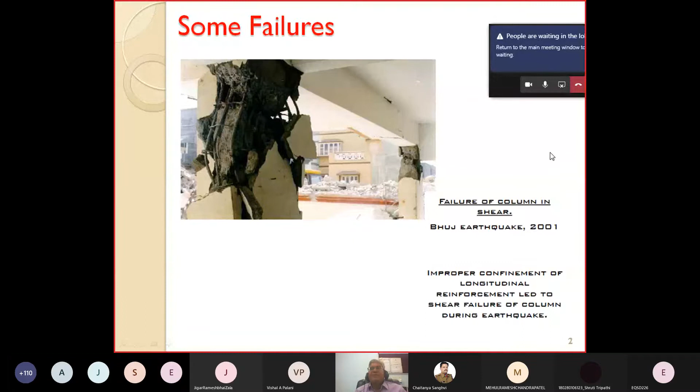Let us have some more pictures. This one shows a similar kind of distress, but a slightly different situation. This is because of the inelastic deformation of the column due to lack of confinement. You can see here all the longitudinal bars have buckled because there is a less amount of confinement to the longitudinal reinforcement.

Another picture of the Kobe earthquake, where the reason was identified as insufficient, prematurely terminated longitudinal reinforcement and inadequate hoop reinforcement. See, the entire bridge is collapsed on one side, and see the amount of reinforcement visible here. This is because of the insufficient, prematurely terminated longitudinal reinforcement.

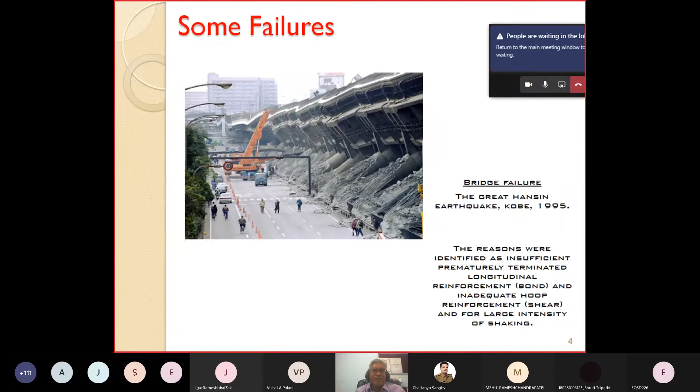This is a very heavy structure. Of course it was a bridge structure, and when ductility is not taken care of properly, the entire bridge is overturned. This is very common in majority of reinforced concrete buildings, which is known as the short column effect.

These are pictures of the 2001 Bhuj earthquake. We can see that the upper story is stiffened by brick masonry infill walls, while the lower story is less stiff. Because of that, there is an uneven distribution of stiffness which leads to failure. The entire building was intact, but it failed from the ground story. This is a very common type of failure observed in urban areas.

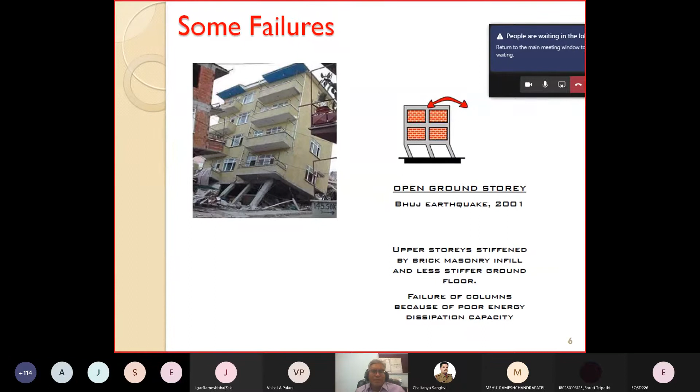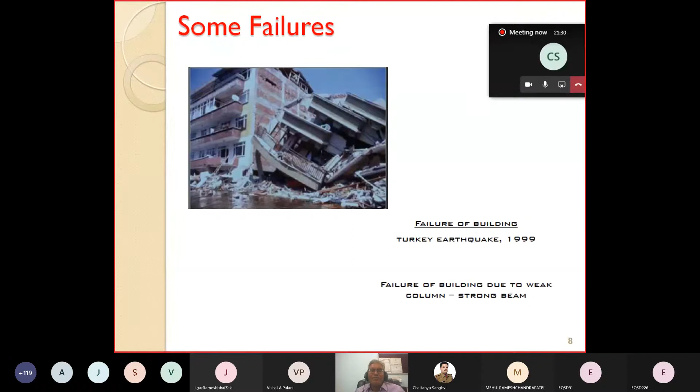Again, failure of the building in the Turkey earthquake, due to the weak column, strong beam configuration. We will see in detail there is a strong column weak beam theory and a weak column strong beam theory. Basically, to make ductile structures, this kind of configuration is not going to be helpful. One has to go for a strong column and weak beam instead of a weak column and strong beam. This will lead to disaster for such a problem.

We can see the caption from one of the very eminent persons, Paulay and Priestley. Many of you might have also used the book by Paulay and Priestley. The observation of building responses in actual earthquakes indicated that the lack of strength did not always result in failure, provided that the structural strength could be maintained without excessive degradation as inelastic deformations developed. The structures would survive the earthquake. So if the structures are forced towards inelastic deformation, perhaps the structures would survive the earthquake. It's a statement from one of the eminent structural engineers, earthquake engineers, Paulay and Priestley.

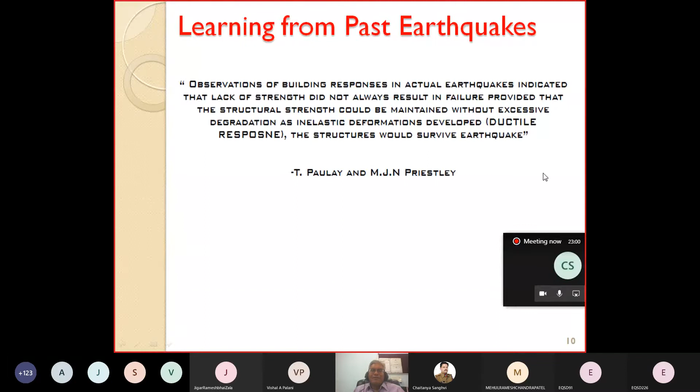And because of this, based on the above statement, an attempt is made here to bring out the importance of ductility in buildings during an earthquake.

So let us discuss some design philosophy. It is economical to design structures to behave in an elastic manner, but it is uneconomical to design structures to behave in an elastic manner to withstand a major earthquake. Why is it uneconomical? That we will see. So one has to go for inelastic behavior to achieve economy in the design.

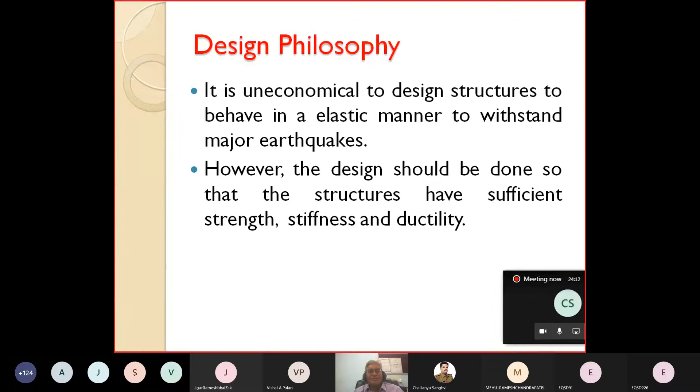The design should be done so that the structure has sufficient strength, stiffness, and ductility. Moreover, most of the time we always concentrate on strength and stiffness, but for earthquake resistant structures, ductility is also an important parameter. There is an utter failure of the strength design philosophy during an earthquake.

Essentially, we need to adopt a capacity design to safeguard the building. So during an earthquake, we need to go for a capacity design philosophy to safeguard the structure. In strength design, the ultimate strength of the structural member is based on assuming a failure condition, whether due to crushing of concrete or yielding of steel. Whereas in capacity design, we design the element suitably for energy dissipation under severe imposed inelastic deformation. So here we have to design the element that is suitable for energy dissipation under severe imposed inelastic deformations.

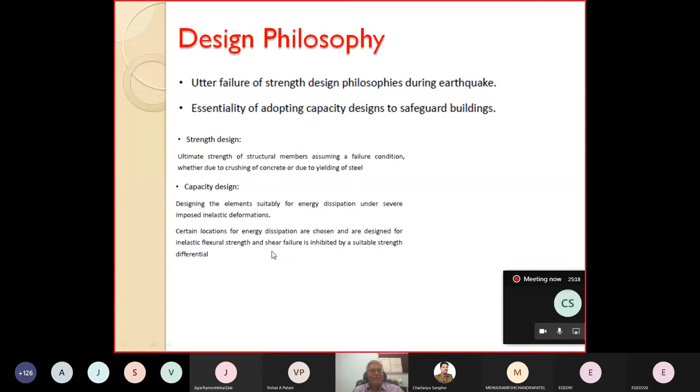Certain locations for energy dissipation are chosen and are designed for inelastic flexural strength, and shear failure is inhibited by suitable strength differential. You might have also experienced a simple example with this chain. This is a brittle chain, and how to make this brittle chain behave in a ductile manner - let us see this thing.

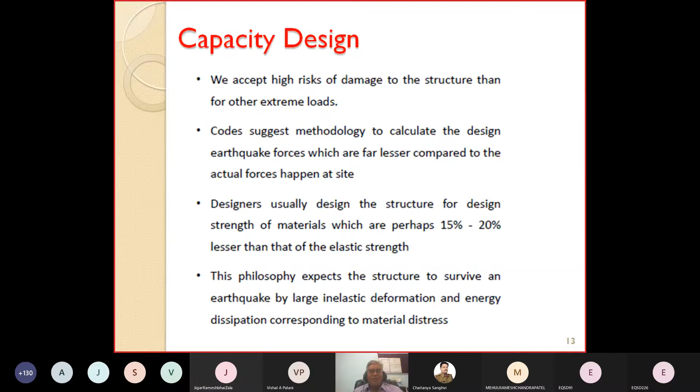Designers usually design structures for the design strength of material, which is perhaps 15 to 20% lesser than the elastic strength. This philosophy expects the structures to survive an earthquake through large inelastic deformation and energy dissipation corresponding to material distress.

It is observed that lack of strength against the actual earthquake force will not always result in failure, provided the structural strength is maintained without excessive degradation with increase in inelastic deformation. This is a very important statement. This inelastic response has emerged as an important factor for seismic design. We have to ensure that during a major earthquake, the structure moves in the inelastic range, and that way we can release the energy.

Observations state that not all inelastic modes of deformation are equally viable; some lead to failure while others perform well because of ductility. Inelastic deformation should never lead to brittle failure of a building or its elements.

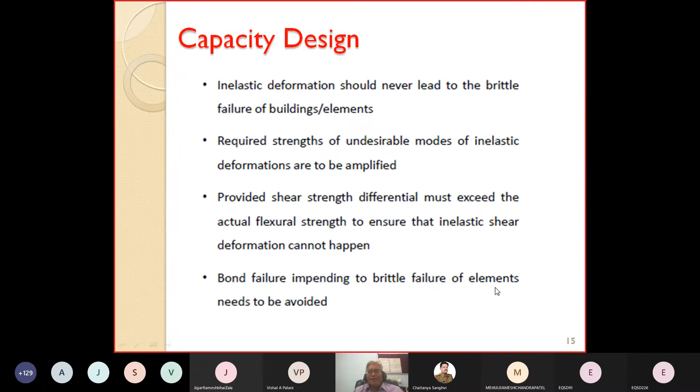Required strength for undesirable modes of inelastic deformation must be amplified. Provided shear strength differential must exceed the actual flexural strength to ensure inelastic shear deformations cannot happen. This has to be done very carefully - shear strength differential must exceed actual flexural strength to ensure inelastic shear deformations cannot take place. And bond failure, which leads to brittle failure of the element, needs to be avoided. That is why in capacity design, the sequence must be followed as is.

First is beam flexural design, then beam shear design as per ductile detailing code, column flexural design, column transverse reinforcement design, then strength of the element at the beam-column joint, and beam-column joint design. The code suggests various formulas which, when followed, inhibit the undesirable inelastic modes of deformation - that is shear and bond. These are the undesirable inelastic modes of deformation.

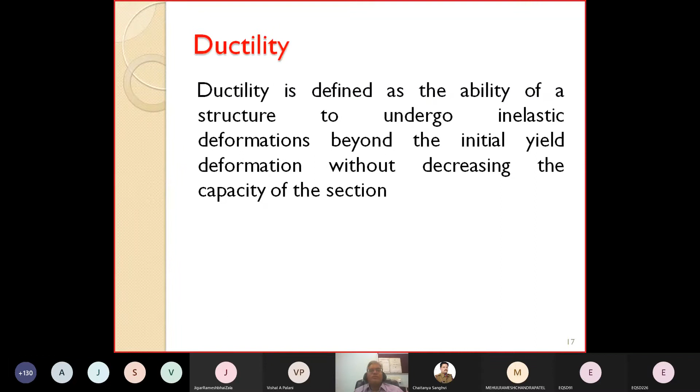Ductility plays a very important role and can be defined as the ability of our structures to undergo inelastic deformations beyond the initial yield deformations without decreasing the capacity of the section. So one can undergo large inelastic deformation without decreasing the capacity of the sections. Ductility in the design of RC members can be expressed with respect to displacement, curvature, or rotation of the member.

In the elastic response, consider the oscillator. When we give it an initial displacement, it will move towards one direction, say towards the left hand side, shown on the force versus deformation diagram - lateral force versus lateral deflection. The area OAB represents the potential energy stored in the member when maximum deflection occurs. When the body moves to the maximum deflection point, the potential energy stored is nothing but the area under this load-deformation curve. This energy is converted into kinetic energy when the mass returns to the zero position - so the potential energy converts into kinetic energy.

Whereas in the elastoplastic response, the oscillator forms a plastic hinge at a much lower response compared to the elastic response, while the deflection response continues along the path CD.

So the C point that will be at a much lower response, and then the deflection response continues towards point D, going to the maximum displacement. The potential energy here is nothing but the area of the load deformation curve.

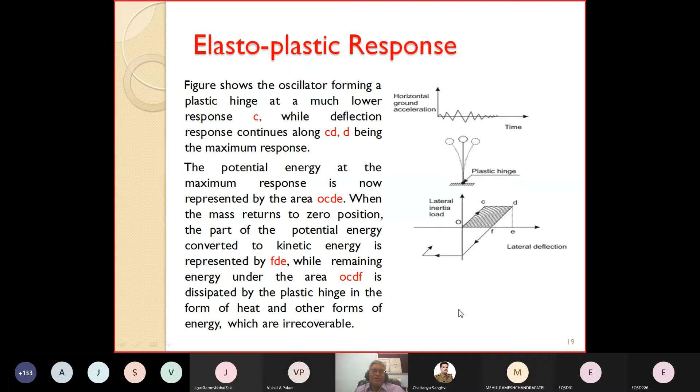So OCDE, these represent the potential energy. When the mass returns to the zero position, this part of the potential energy converts into kinetic energy. This triangle portion, which is unshaded, is the potential energy converted into kinetic energy, while the remaining energy under the area is dissipated by the plastic hinge in the form of heat and other irrecoverable forms.

So in the elastic response, it is evident that the full potential energy is converted into kinetic energy, while in elastoplastic response, only a part of the energy is converted into kinetic energy. So the potential energy stored in elastoplastic structures may not equal that of elastic structures, and the maximum deflection of elastoplastic structures may not equal that of elastic structures.

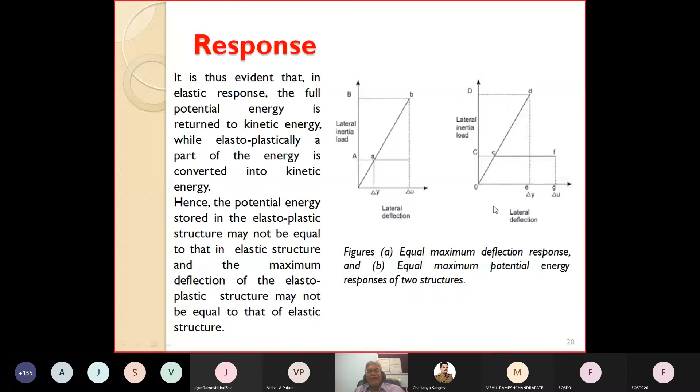The first figure shows the equal maximum deflection response, and this is the equal maximum potential energy response of the two structures. Whatever potential energy is stored during the elastic response can be considered similarly for the elastoplastic response, by having a large amount of deformation, that is, large amounts of inelastic deformation.

So let us now move towards ductility. In general, the literature defines three types of ductility: displacement ductility, curvature ductility, and rotational ductility. Displacement ductility is a measure of the ductility of a structure.

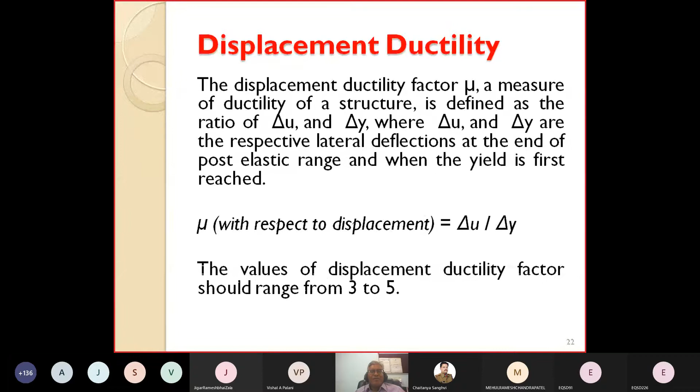It is defined as the ratio of delta U by delta Y, where delta U is the lateral deflection at the end of the post-elastic range, that is, the ultimate displacement, to the first yield displacement. So it is the ratio of ultimate to yield displacement, and the value of this displacement ductility factor should be in the range of 3 to 5.

Curvature ductility has the same definition, but instead of displacement, we consider curvature. So phi u and phi y are the curvature at the end of the post-elastic range and the first curvature at the first yield point of the steel, respectively.

Here the curvature ductility factor is significantly different from the displacement ductility factor. At the start of yielding of the frame, the deformation concentrates at the position of the plastic hinge. Therefore, when a frame is deflected laterally in the post-elastic range, the ratio of phi u by phi y in the plastic hinge may be greater than the delta u by delta y ratio.

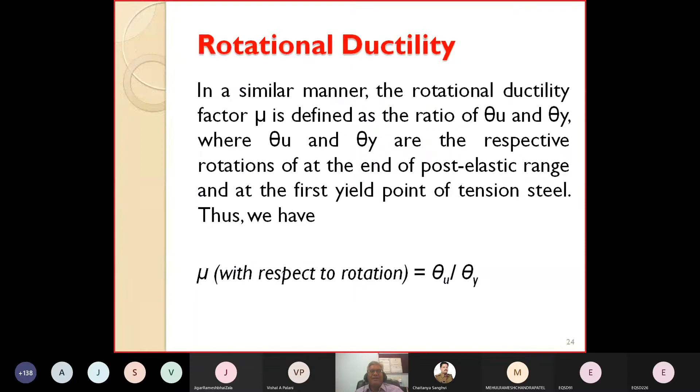The third one is rotational ductility, which is the ratio of rotation theta at the ultimate stage to theta at the yield stage. So there are three methods of defining ductility. In general, ductility can be stated as the ratio of absolute maximum deformation at the end of the post-elastic range to the yield deformation.

Accordingly, ductility can be defined with respect to strain, rotation, curvature, or deflection. Rotation and curvature-based ductility factors take into account the shape and size of the member. Though there is no special advantage of one definition over the other, IS 13920:1993 has defined curvature ductility only.

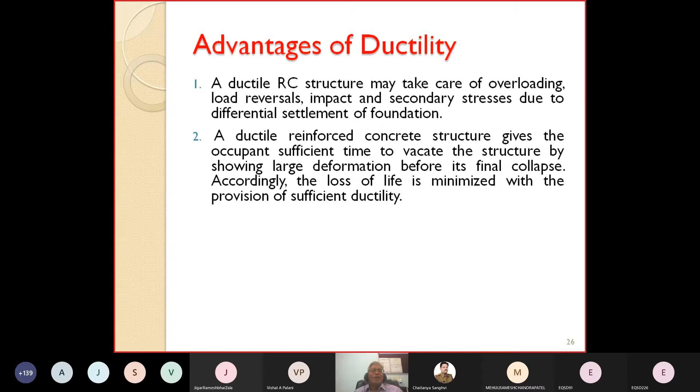What is the advantage of ductility? A ductile reinforced concrete structure may take care of overloading, reversal of loading, impact, and secondary stresses due to differential settlement of the foundation. A ductile reinforced concrete structure also gives occupants sufficient time to vacate before large deformations lead to final collapse, and hence the loss of life is minimized with the provision of sufficient ductility.

Properly designed ductile joints are capable of resisting force and deformation at the yielding of steel reinforcement, and therefore these sections can reach their respective moment capacity, which is one of the requirements in the design of reinforced concrete structures by the limit state method. This is one of the essential assumptions in the limit state method: that the design should be such that ductile behavior is observed.

As all of you might have seen, a simple example is a frame subjected to gravity load. When it is subjected to gravity load, this is the deflection diagram due to the gravity load, and the deflected shape shows the tension occurring on the face. The red color shown here indicates the locations of tension that occur in the frame of the reinforced concrete structure.

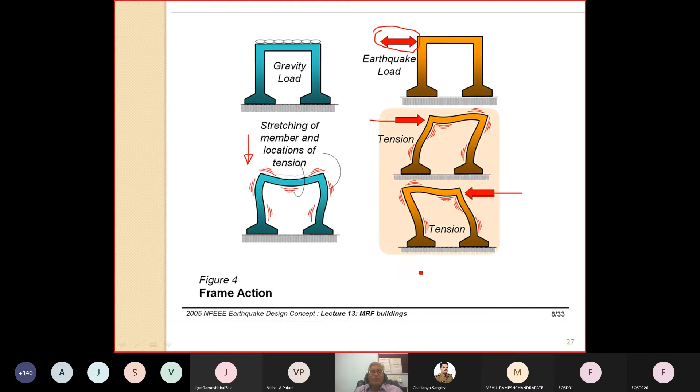Earthquake load is a vibratory kind of load. There will be a to-and-fro motion, so that when the force acts in one direction, there is a sway towards the left hand side, and when the force acts towards the right, there is a sway towards the right hand side. So it's a vibratory kind of force, and the reversal of stresses is going to take place during the earthquake.

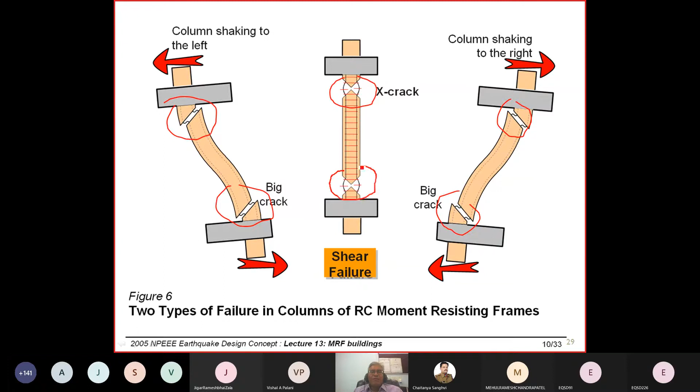See the type of failure, shear failure, when the shear force occurs and the column shaking is towards the left hand side. The shear failure takes place just very near the support. So at the support one can see such diagonal cracks, and here also diagonal cracks are found when there is shaking in the different direction. So particularly these are the potential places where diagonal cracks are found during shear failure.

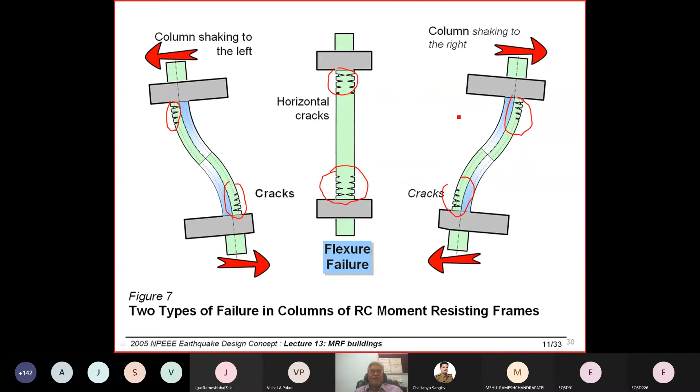In flexure failure, we can see that cracks are also found in the tension face. So in the tension face, the cracks are found near the joints. So particularly these are again the potential places for both flexure and shear cracks, and so we need to take care that there is a possibility of formation of a plastic hinge, and this can be designed properly in the structures.

In ductile frame design, the hysteretic loop should be stable and full. In the story mechanism, the column requires too much ductility, and it is very difficult to make the columns ductile, and hence it is to be avoided.

Whereas in the sway mechanism, it ensures the beam yields before the columns, so that strong column and weak beam design is to be adopted in the capacity design concept. In a capacity design concept, one has to go for a strong column and a weak beam. We have seen some photographs that if the reverse is true, weak column and strong beams, how the columns are subjected to failure near the joint.

It may fail either in flexure or shear, depending on whichever strength is found lesser, that is going to fail.

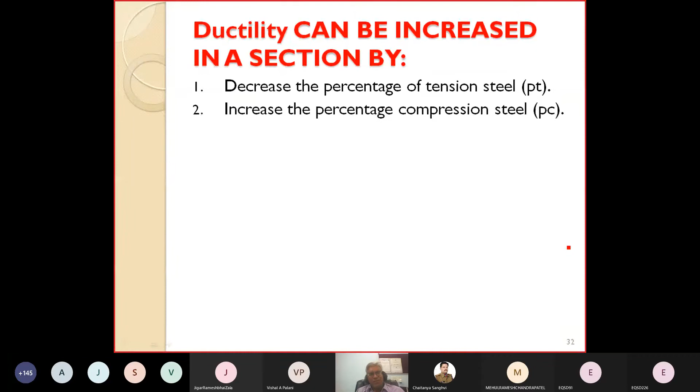Ductility can be increased in the sections by decreasing the percentage of tension steel, reducing the AST. We can invite flexure, we can ensure the steel yields first, then the concrete, and we get the advantage of inelastic deformation in the steel. Increase in the percentage of compression reinforcement helps achieve ductility, along with decrease in tensile strength of steel and increase in compressive strength of concrete.

Increase in the compression flange area in the flanged beam, and increase in the transverse shear reinforcement. By increasing the transverse and shear reinforcement, we can increase the confinement in the concrete, and confined concrete always has higher strength than unconfined concrete. So by increasing the confinement, we can also increase the ductility of the section.

There is a code for ductile design and detailing of RC structures, IS 13920 of 2016. This code was earlier the 1993 edition, and recently it has been revised to the 2016 edition, and the criteria given in this code has to be followed.

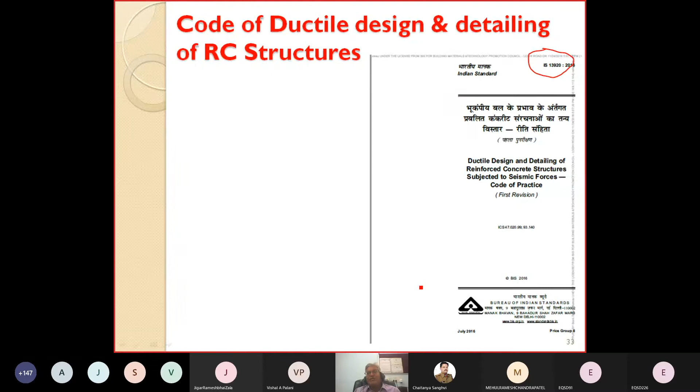We are going to discuss this in the coming sessions: ductile design and detailing of reinforced concrete structures subjected to seismic force. We are giving more time to discuss some provisions of this code, IS 13920:2016, to understand how the detailing can be carried out so that we can make our structures ductile. All these provisions are based on experimental studies conducted by various researchers, and are put here to ensure that ductility can be achieved in the structures.

So let us see some of the general specifications of IS 13920. The design and construction of RC buildings shall be governed by the provisions of IS 456 except as modified by this code. The minimum grade of structural concrete shall be M20, but M25 for buildings more than 15 meters in height in seismic zones 3, 4 and 5, but not less than that required by IS 456 based on the exposure condition.

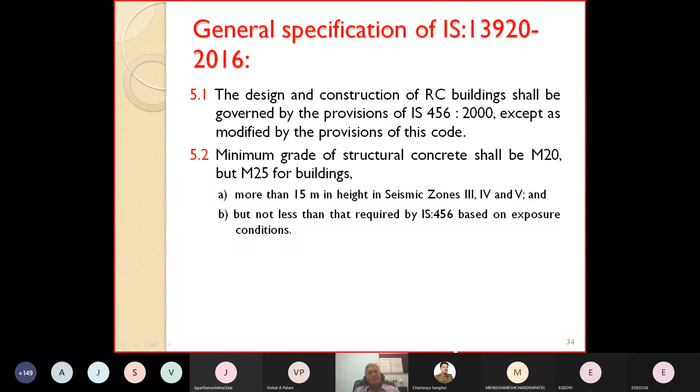Steel reinforcement resisting the earthquake induced forces in the RC frame members and the boundary elements of the RC structural wall should comply with the following criteria. Steel reinforcement used shall be of grade 415 or less, or of grade FE 500 and 550, that is high strength deformed steel bars produced by the TMT process.

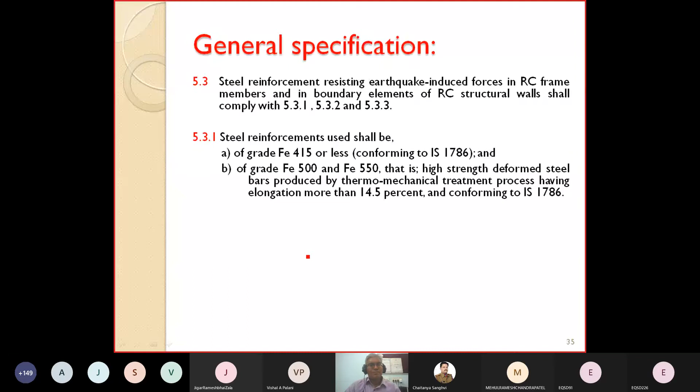Just a minute. Hello. Yeah, is it visible? Hello. Yes, it is visible. Okay. Actually the computer was discharged for a few minutes, so that is it.

So the steel reinforcement of grade 500 and 550, if it is being used, then the percentage elongation should be at least 14.5%. The actual 0.2 percentage proof stress of the steel bar based on the tensile test must not exceed its characteristic 0.2 percentage proof strength by more than 20%. And the ratio of actual ultimate strength to actual 0.2 percentage proof strength shall be at least 1.15.

In the RC frame building, the lintel beam shall not be integrated to the column to avoid the short column effect. We have seen that if the lintel reinforcements are extended to the column, possibly the column becomes a short column. So this can be avoided, but if it is integrated, then it should be taken care of in the analytical model of the structural analysis. The same applies to the plinth beam or the staircase beam - if inserted, it should be considered into the analytical model, and its effect will be considered in the structural analysis.

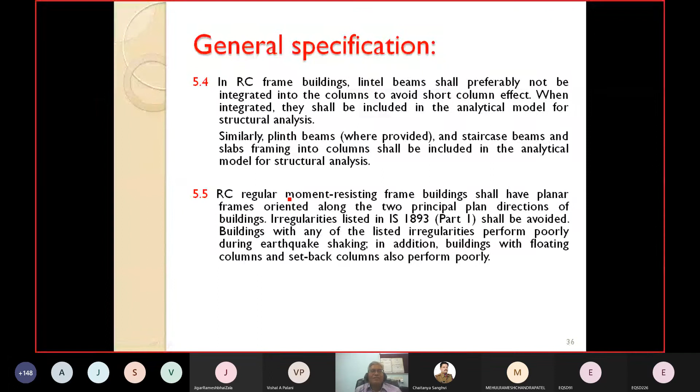The reinforced concrete regular moment resisting frame shall have planar frames oriented along the two principal plan directions of the building. Irregularities listed in IS 1893 shall be avoided - this is one of the important parts. Buildings with any of these listed irregularities perform poorly during earthquake shaking. In addition, buildings with floating columns or setback columns also perform poorly. So whatever irregularities are prescribed by IS 1893 part 1 should, as far as possible, be avoided; otherwise necessary treatment must be given. When such irregularities are adopted, detailed nonlinear analysis shall be performed to demonstrate there is no threat to loss of life and property.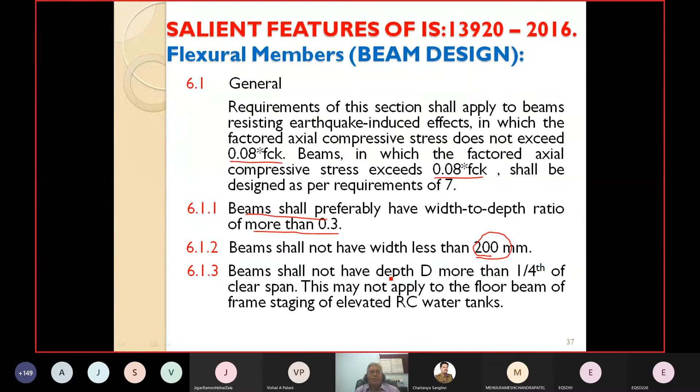This is related to the width of the beam, particularly when there is a wider beam. In these situations, the width of the beam shall not exceed the width of the supporting member plus an additional amount. This is applicable basically to a wider beam - in these situations, what should be the width of the beam to be considered?

Regarding the longitudinal reinforcement in the beam: the beam shall have at least two 12 mm diameter bars at each top and bottom face, one at each corner. The minimum longitudinal steel is 0.24 under root of FCK by FY - one has to provide at least this much minimum steel in the structure. The maximum longitudinal steel is 2.5%; we cannot go for more because congestion of reinforcement will ultimately lead to difficulty in pouring the concrete.

Longitudinal steel on the bottom face of a beam framing into the column shall be at least half of the steel on the top face. This is because at the junction there is always a hogging moment, tension at the top and compression at the bottom. So when we provide the steel, the steel at the bottom face of the beam should be at least half of the steel on the top face of the beam.

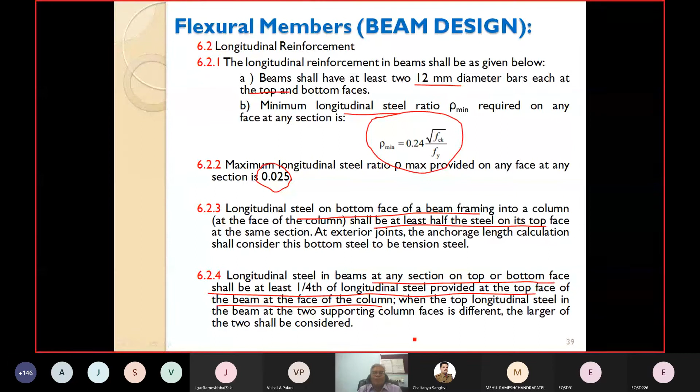Similarly, there is also one more provision: longitudinal steel in the beam at any section on the top or bottom face shall be at least one-fourth of the longitudinal steel provided at the top face of the beam at the face of the column. At any point, either top or bottom, the steel should not be less than one-fourth of the longitudinal steel provided at the top face of the beam. So these are some of the provisions to be taken care of.

Again, at the exterior joint, the top and bottom bars of the beam shall be provided with anchorage length. This anchorage length beyond the inner face of the column is equal to the development length of the bar in tension plus 10 times the diameter of the bar, minus the allowance for the 90-degree bend.

Splicing is many times needed when the length of the beam will be larger than the length of the bar available.

Vijay sir, your voice is not audible. Hello. Hello. Hello. Yes, please. Hello. Yes, please. Hello. Hello. Just a minute. Okay, I'll just. Hello. Hello, yes sir, please speak. Hello, yes sir, please speak. Is it audible? Yeah, audible. Okay.

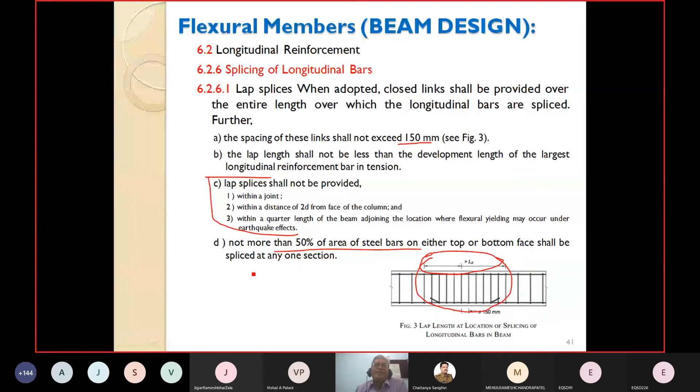And not more than 50% of the area of steel bars on either the top or bottom face shall be spliced at any section.

Again, certain devices like a mechanical coupler can be used. A mechanical coupler shall be used when longitudinal bars have to be continued for a beam span. But whenever couplers are used, only those mechanical splices conforming to the code and capable of developing the specified tensile strength of the splice bar shall be permitted.

And the spacing between the adjacent longitudinal bars shall be based on the outer size of the coupler, to allow easy flow of the concrete. So this has to be taken care of.

Welded splices shall not be used in the beam for a distance equal to 2 times the depth of the member from the member face. Also, welding is not much advisable in the column. It may be advisable in beams, but not advisable in columns, because it leads to brittleness, and anything that leads to brittleness should not be used.

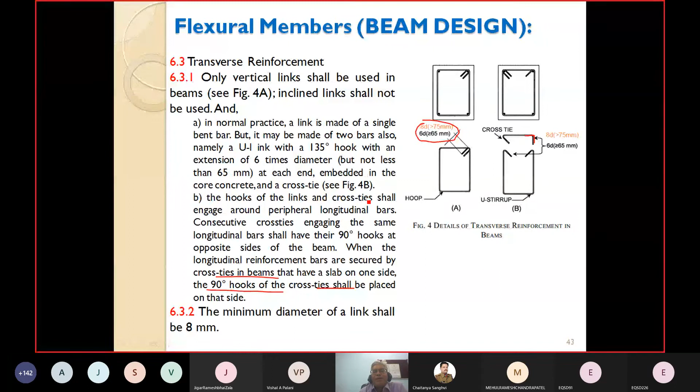So the 135-degree hook, with a size of 6 times the diameter of the bar but not less than 65 mm, is to be embedded into the core concrete. This is also applicable to the cross tie. The minimum diameter of the link shall be 8 mm.

Transverse reinforcement is basically decided based on design shear force requirements. The shear capacity of the beam shall be more than the larger of the factored shear force as per linear structural analysis, and the factored gravity shear force plus equilibrium shear force when plastic hinges are formed at both ends of the beam. In earthquake resistant design, strong column-weak beam theory is adopted, so there is a possibility of plastic hinges forming at both ends of the beam. In this case, we find the design shear force as the result of gravity shear plus equilibrium shear force, which can occur due to sway towards the left or towards the right.

When the sway is towards the right, a clockwise moment develops at both ends, and when sway is towards the left, an anti-clockwise moment develops at both ends. In these situations, the design shear can be calculated at both ends based on the direction of shear obtained from equilibrium of forces. These formulas can be used to determine the shear force capacity of the beam.

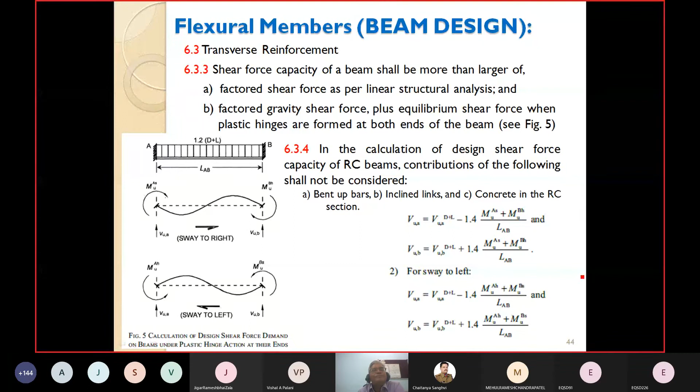Transverse reinforcement, that is close spacing of links, over the length of 2D from the face of the column should not exceed d by 4, 8 times the diameter of the smallest longitudinal bar, or 100 mm. So there is closer spacing near the face of the column at both left and right ends. The first link shall be at a distance not exceeding 50 mm from the joint face.

Closely spaced links shall be provided over a length of 2D on either side of sections where flexural yielding may occur under earthquake effect. In the remaining length, vertical links shall be provided at a spacing not exceeding d by 2. So in this zone there is closer spacing based on this criteria, and in the remaining length, one can go for a hoop spacing not greater than d by 2.

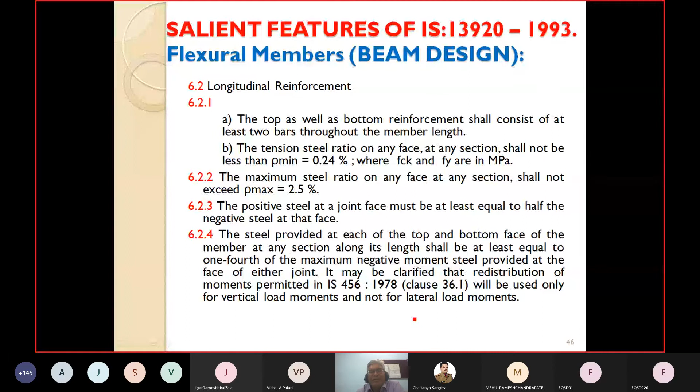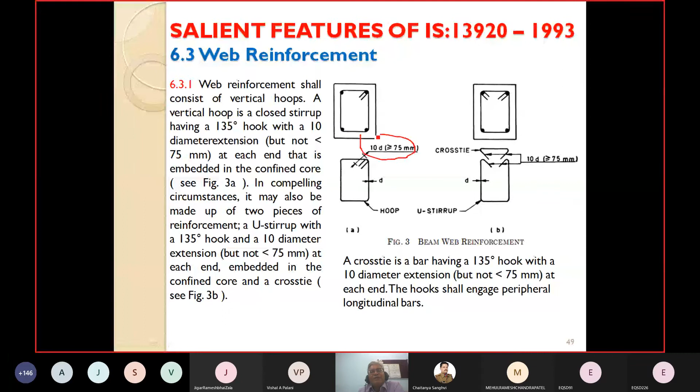These are some provisions of the same code as it was earlier. Many of the provisions are very similar; some values are going to change, so I'm not going to discuss this in detail. These are provisions from the 1993 code: as we have seen, LD plus 10 times the diameter of the bars - same thing is there. Similarly, the splice specifications are similar. For web reinforcement, again a 135-degree hook, but here it was 10 times D and 75 mm, which is now reduced to 6 times D and 65 mm. This is again the same thing, only some nomenclatures differ, but the essentials remain.

Let us see some provisions of the column. The requirement is that the axial compressive stress due to gravity and earthquake effect exceeds 0.08 FCK. As we have seen, if the axial stress is below this 0.08 FCK, we can treat it as a beam and apply the provisions of the beam. If it is more than this, then we go for the column provisions.

Factored axial compressive stress, considering all load combinations relating to seismic load, shall be limited to 0.4 FCK in all such members. For various shapes of the column other than rectangular - circular, T-shape, X-shape, etc. - appropriate design and detailing shall be carried out using specialist literature. So this provision is applicable only to the rectangular shape of the column. For shapes other than rectangular and circular, we have to refer to specialist literature.

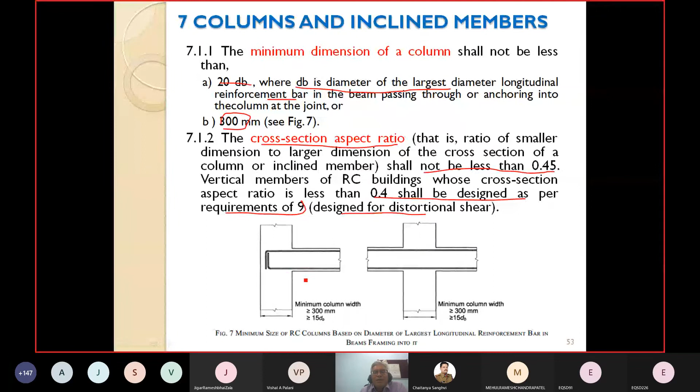For a vertical member of an RC member whose cross section aspect ratio is less than 0.4, it shall be designed as per the requirement of Section 9, which is basically a case of distortional shear. So if the cross section aspect ratio is less than 0.4, you need to apply the criteria of distortional shear. So this is the minimum column width that can be done.

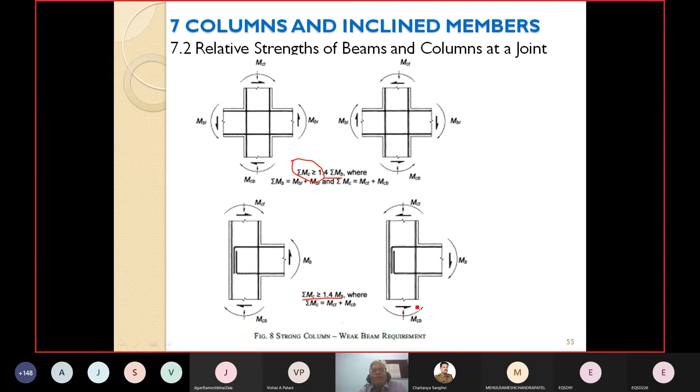Relative strength of beam and column. You can see the relative strength in the figure. Summation of the moment in the column should be greater than 1.4 times the summation of the moment in the beam. Similarly, at the corner also we can apply the same thing. So this is the relative strength of beam and column at the junction.

The longitudinal reinforcement, as it is a circular column, minimum 6 bars. For splicing of the longitudinal bars, when lap splice is adopted, closed links shall be provided over the entire length over which the longitudinal bars are to be spliced, and spacing of this link shall not exceed 100 mm. The lap length shall not be less than the development length of the largest longitudinal bar in tension.

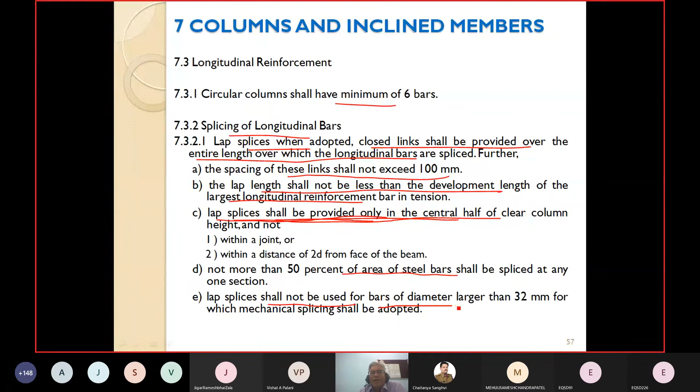The lap splice shall be provided only in the central half of the clear column height, because the point of contraflexure is likely to be somewhere in the middle range with less moment. Again, not more than 50% of the area of steel shall be spliced at one section, and lap splice shall not be used for bar diameter greater than 32 mm, for which mechanical splicing shall be adopted.

Ductile detailing is a must for structures in zone 4 and 5. However, it should be followed in zone 3 when the importance factor is more than 1, or the structure is having more than 5 storey height, or the structure is in the industrial zone.

Factored axial stress under seismic load: if the factored axial stress is less than 0.1 FCK, ductile detailing is not required. These are all provisions we have discussed earlier.

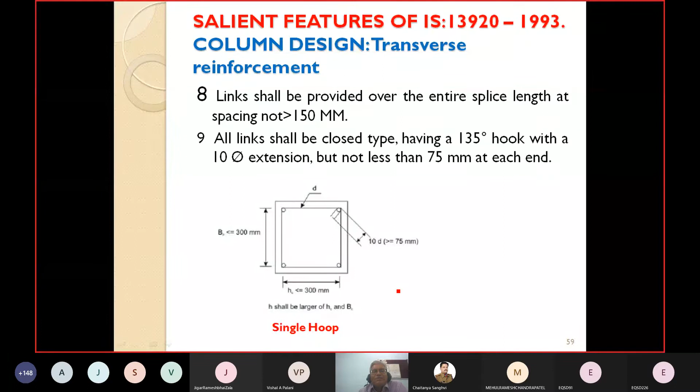Links should be provided over the entire splice length, with spacing not more than 150 mm, and a 135-degree hook with an extension of 10 times the diameter of the bar. When the length of the column side is more than 300 mm, additional cross ties are also required to be provided. These cross ties are provided where there is an overlapping of the hoop reinforcement.

Special confining reinforcement is one of the features of ductile detailing. Wherever there is a possibility of potential hinge formation, there is a need to provide special confining reinforcement. As we have discussed, by confining the concrete we can get higher strength. That is why special confining reinforcement should be provided in beams and columns, unless a large amount of transverse reinforcement is required from shear consideration.

Length of the special confining reinforcement should not be less than the maximum lateral dimension of the column, 1/6 of the clear column span, or 450 mm. Length of the special confining reinforcement shall be at least 300 mm in the foundation. Whenever we provide bars in the foundation, there should be a confinement of at least 300 mm.

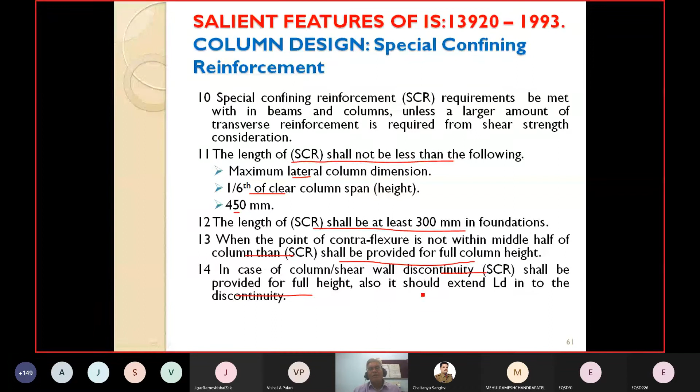In case of column or shear wall discontinuities, wherever there is a discontinuity, special confining reinforcement shall be provided for the full height. These are some of the criteria for special confining reinforcement.

Confined joint within the beam framing, that is on the 4 sides, that is also there.

So these are some of the design shear force in the column. In the column, we can find out the design shear force based on the limiting moment that can be achieved by using the same formula. By this, the shear can be calculated.

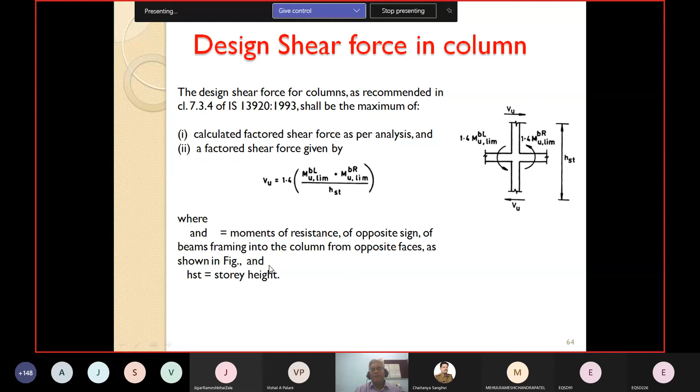Let us see some examples of whatever we have discussed in this code. See some of the calculation part that would give you more clarity.

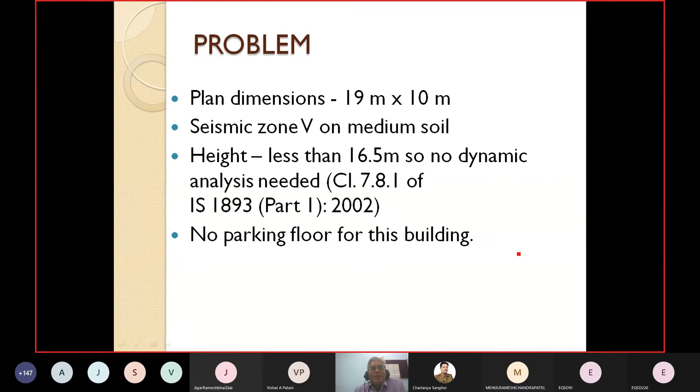This is the beam design of an RC frame in the seismic zone, plan dimension of 19 meter by 10 meter, seismic zone 5 on medium soil, height less than 16.5 meters, and no parking floor for this building. A very simple configuration is taken.

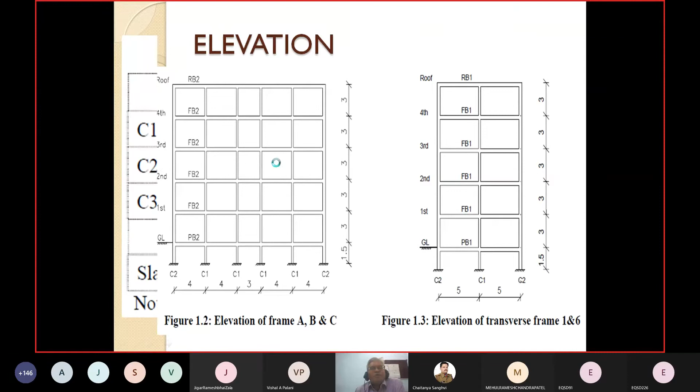This elevation, I think, is very clear to all of us. So it is ground level. It's a 5-story building. The column size after designing is taken as C1, which we have seen, this is 300 by 500 mm. C2 these are 400 by 400. C3, all in the intermediate column, 400 by 500.

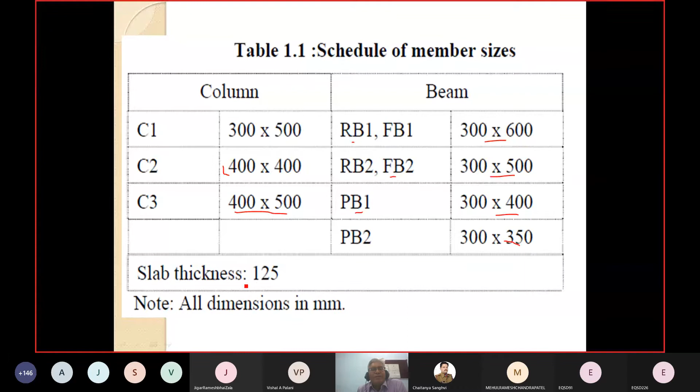These are the plinth beam, floor beam, and the top beam. So these are the beam sizes to be taken: 300 by 600, 500, 400, and 350. Slab thickness is taken as 125 mm.

The loading on the roof. So as it is, the dead load and live loads can be calculated in a traditional way, the way we calculate, whether it is trapezoidal or triangle distribution. That can be achieved and calculated. Grade of concrete and some features: M20, Fe415, live load 1.5 kN on the roof, and on the floor 3 kilonewton per meter square. Roof finish, floor finish, brick wall density, and all the things are taken.

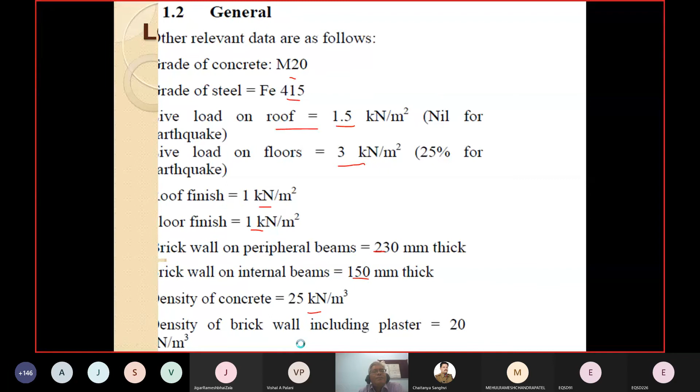Load combination, that is as per IS 1893. For regular buildings there are 13 combinations to be taken for dead load, live load, and earthquake load, with appropriate partial safety factors.

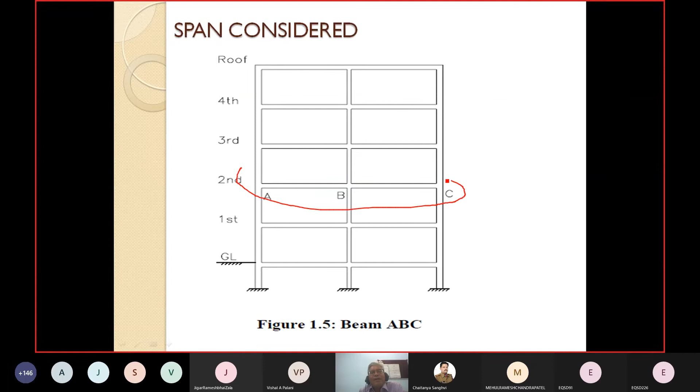Let us go for the ductile designing of this beam ABC. So after this analysis into any software, for the beam AB, the force resultant for the various load cases and load combinations is obtained. At left hand, centered, and right hand, the value of the shear force and moment is listed here for dead load, live load, and earthquake, considered in the Y direction. So these are the summary of the forces which we have obtained after the analysis.

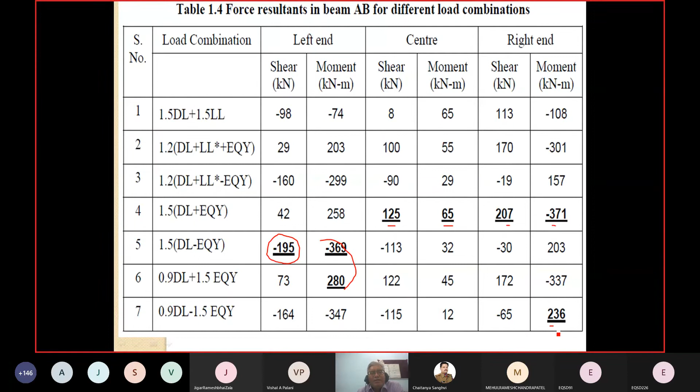And again, after the load combination, at the left hand and right hand, that is listed, and out of that the value which is found to be critical for the design is put here just by the dark and the underline. So the shear force, similarly the moment here, similarly at the center shear and moment, and at the right hand shear and moments — these are listed here. These are just after the linear analysis that we have done.

Now let us go for various checks. The first thing is the axial force. Of course, here the axial force — because there is a very less amount of axial force, of course some value might be there, but it is a very less value, so that is why it is less than the limit.

Of course, this example is to be solved as per IS 13920/1993, so some relevant modifications are there. Instead of 0.1 FCK, it is 0.08 FCK. So this value has to be compared with 0.08 FCK, and if it is less than that, then it can be designed as a flexure member. The member size: we have taken the width of the beam as 300 mm, which is again more than 200 mm as prescribed in the code, so it is okay. And the B by D ratio, with B as 300 mm, we found to be 0.5, which is again more than 0.3 as per the code.

So you have to also proportionate the cross-sectional dimension to match this value. The span by depth, this dimension - again the depth should not be more than 1/4 of the span. So here L by D is calculated, and this value is found to be 8.33, which is more than 4. So this is satisfied as per the criteria, and this criteria remains as it is in the new code.

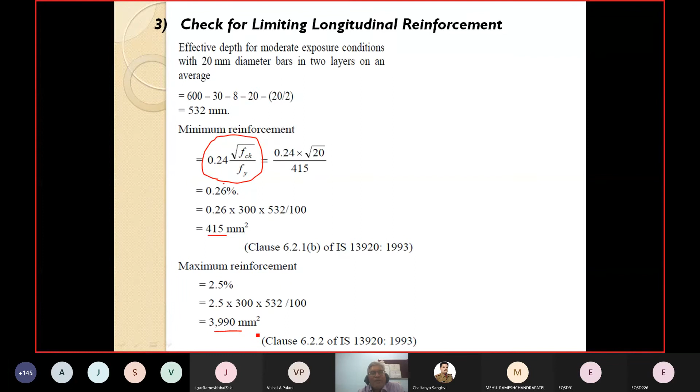Moderate exposure condition, effective depth, the minimum amount of reinforcement is 0.24 root FCK upon Fy. This leads to 415 mm square, and maximum reinforcement is 2.5%, which comes to 3990 mm square. So this is the minimum and maximum amount of reinforcement permitted in this code.

Let us start with the hogging moment. Maximum moment, as we have seen in the summary table, was 369 kilonewton meter. Based on this, we determine the reinforcement using limit state philosophy, by IS SP16 or whatever way there is. It is found to be a doubly reinforced beam, and hence the percentage of reinforcement AST and ASC is found to be 1.46% and 0.54% respectively. 1.46% AST leads to 2330 mm square, which is again in between the minimum and maximum reinforcement criteria.

Similarly, at the bottom, there should be 50% reinforcement. So when we go for 50% of the reinforcement, since we have 1.46%, 1.46% by 2 gives 0.73%, and this is more than the 0.54%. Otherwise, in a normal design, we would provide 0.54% reinforcement at the bottom based on the doubly reinforced criteria. But because ductile detailing criteria is adopted here, we have to provide at least 50% of the AST at the bottom face.

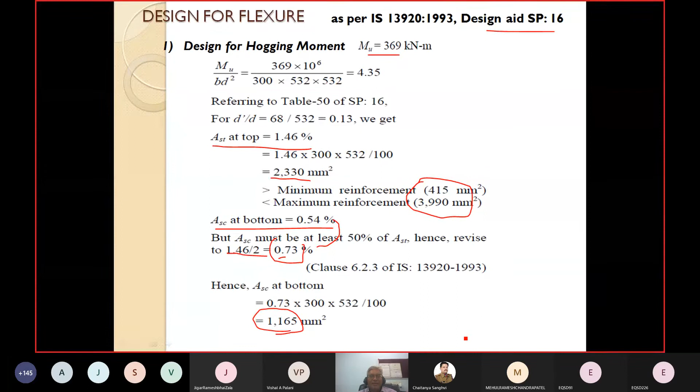Similarly, for sagging moment, this is to be designed as a T-beam, and based on T-beam philosophy theory, we get the amount of reinforcement AST to be 1512 mm square. Again, it will be between the minimum and maximum, and one must ensure that ASC - there is no need to provide ASC because with the T-beam we are getting a large amount of compression, so there is no need to provide any compression reinforcement.

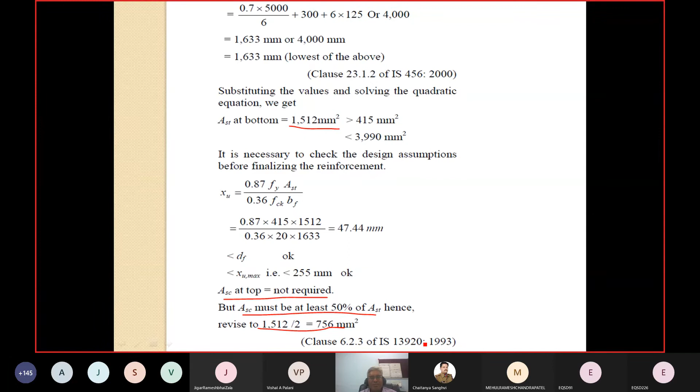But we need to provide at least 50% of the AST. So 50% of the AST needs to be provided at the top, because at the mid span the tension face will be the bottom, so ASC will need to be provided at the top. In these situations, we get the requirement of the reinforcement - at the top, the larger of these values, so we provide this one, and at the bottom, the larger of these, so we provide this much reinforcement.

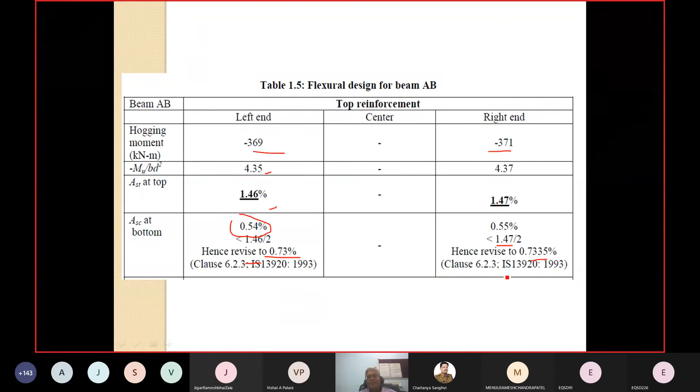The same thing is reflected here in the form of a table, just to give more clarity. This is the hogging moment, at the left end and at the right end. We can find out Mu by bd square, we can find out AST, we can find out ASC, and just see that if the ASC is less than 50%, at least provide 50% reinforcement on the compression face. So this needs to be increased here as per IS 13920.

Similarly, bottom reinforcement - for the sagging moment at the center, we have the AST that is to be provided, so bottom reinforcements are provided here. And again, one has to be careful that at any section, the reinforcement shall not be less than 1/4 of the reinforcement provided at the top face near the junction. So in all situations this 1/4 criteria is applicable, and accordingly we need to provide 0.37% reinforcement, because here the reinforcements are less than 1/4 of the reinforcement.

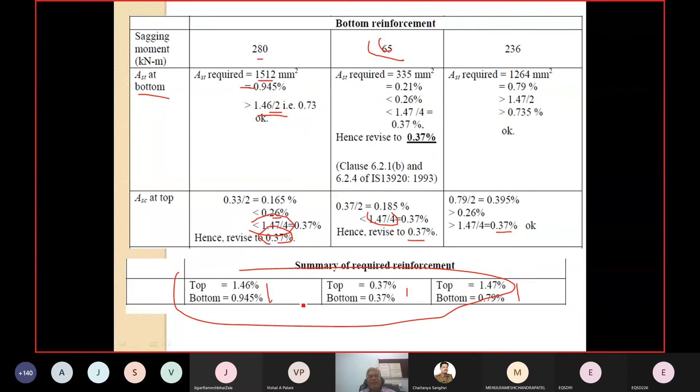Finally, we can summarize this reinforcement at top and bottom, at the left face, at the center, and at the right face. So these are the summary of reinforcements at the end of this.

And accordingly, we are providing some bars straight. So at the top, we are providing 3-16 bars, that is the straight bars, and others are the extra bars. So wherever we need, we provide extra bars.

Similarly, at the bottom, 16 bars are provided, that is straight bars, and the remaining will be provided in the form of extra bars, just to take care of the amount of reinforcement required at all the junctions. And in this way, we can ensure the percentage of reinforcement provided.

Again, we need to ensure here that particularly at the junction, at the end face, we need to provide anchorage of the reinforcement. So sufficient anchorage, development length LD should be 47 phi plus 10 phi, minus the reduction for the 90-degree bend. So we need to provide at least 49 phi, that is 980 mm for the 20 dia bar and 784 for the 16 mm dia bar. So this much amount of anchorage we need to provide.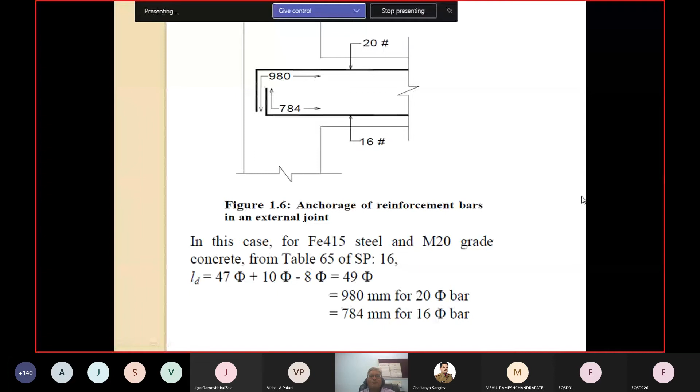So this is for the flexure. Same thing we need to carry out for the design shear strength of the concrete. As these are the tensile steel which is provided, based on that you can find out the permissible design shear stress, tau c, and based on that the design shear strength of the concrete, tau c BD, can be provided.

So the design shear strength of the concrete at the center and right end is evaluated, and accordingly we can find out.

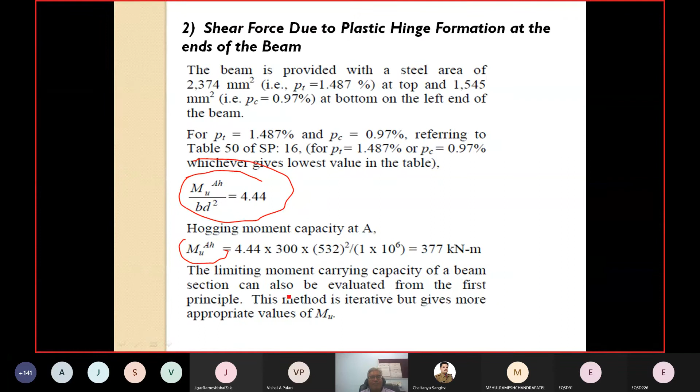So this beam shear strength is due to the plastic hinge formation at the end of the beam, considering there is a plastic hinge. So the value of moment, Mu h, the hogging moment, based on the percentage of reinforcement, we determine the hogging moment. This is nothing but the plastic moment, the limiting moment capacity of the beam is determined, and based on that we can find out.

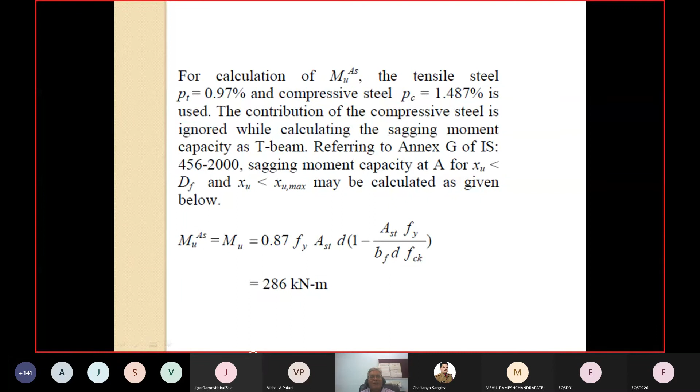Similarly at the left end as well as at the right end, these are the limiting capacities at the center. Similarly for the right end of the beam, we find out the limiting capacity, and the shear is modified, or the equilibrium shear, when sway to right and sway to left, is calculated.

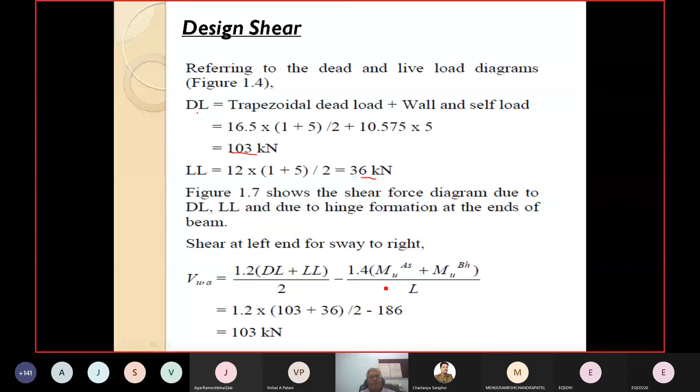Then it is merged with the gravity shear, shear due to the gravity load, that is due to dead load and live load, and this gravity shear will be added with the equilibrium shear. So we are getting the shear at the left end and right end for the sway at left, and similarly for the sway at right.

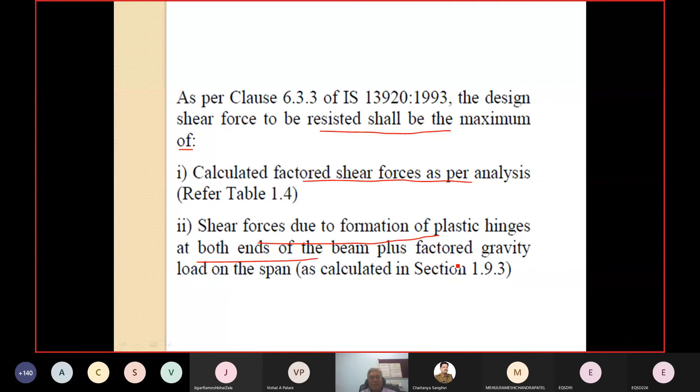So here, as per code 13920, the design shear force that can be resisted shall be the maximum of the calculated shear force as per the analysis and the shear force due to the formation of the plastic hinge at both ends of the beam plus factored gravity loads on the span. So accordingly, the design shear force Vu is calculated for the analysis, and this value, the required capacity, Vu minus Vc, is 145 kilonewton.

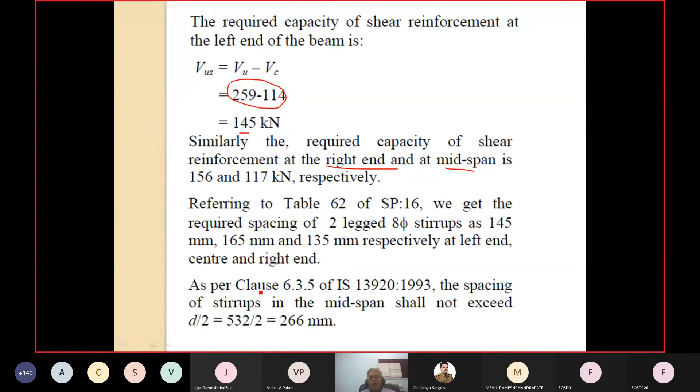So we can find out at the right end and the mid span, and by using this clause we can find out the minimum shear criteria. So based on the shear requirement, we can find out the spacing of the stirrups, and the spacing of the stirrups over a length of 2d at either end of the beam, as per the clause, shall be the least of d by 4 and 8 times the diameter of the smallest bar, and this way we find it need not be less than 100 mm.

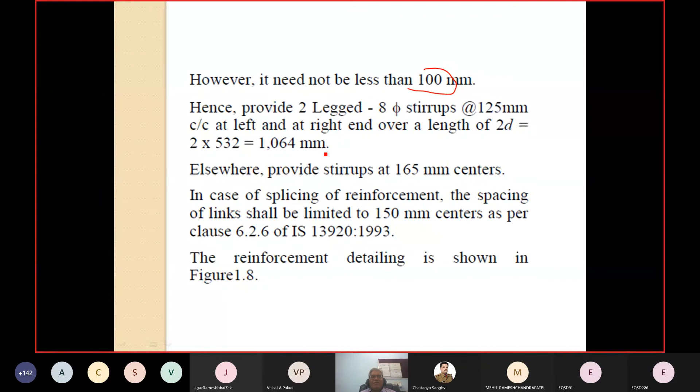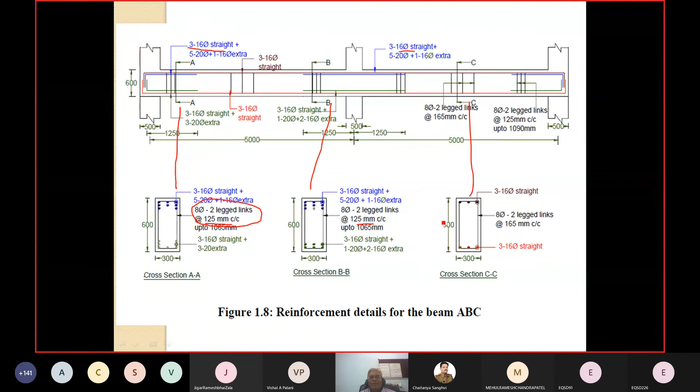This is cross section AA, located at this place. Cross section BB is the right face, and cross section CC is the mid span. So covering all the ductile detailing criteria here, you can see that the transverse spacing we are getting is 8 dia at 125 mm, 125 mm, because of this ductile detailing provision, whereas in the remaining length 165 mm spacings are there.

So this way the same thing can be carried out with different options. Here it is with our IS 456, but considering the response reduction factor 5. The same thing is analyzed, just to compare if we are not providing ductile detailing but considering the response reduction factor 5. And the third case is the reinforcement detail of the beam, again as per IS 456, but with response reduction factor 3, because in zone 2 there is sometimes no need to go for ductile detailing, so we can use response reduction factor 3.

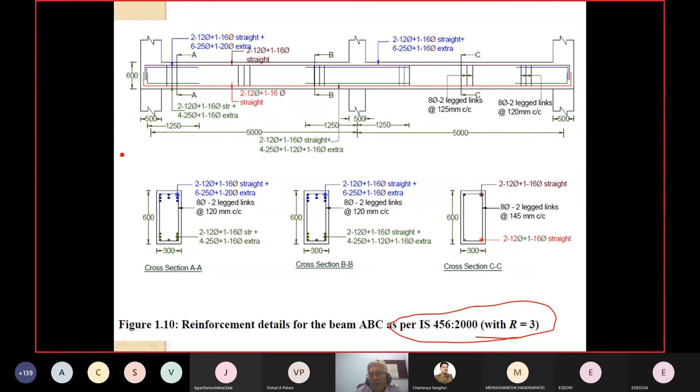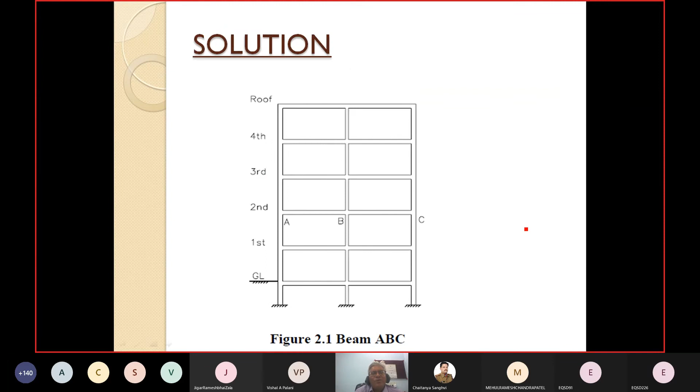As time is very near to end, I will not show this in detail, but the same exercise is carried out for zone 2, and in a similar way the entire analysis is seen, even with ductile detailing provided in zone 2 as well.

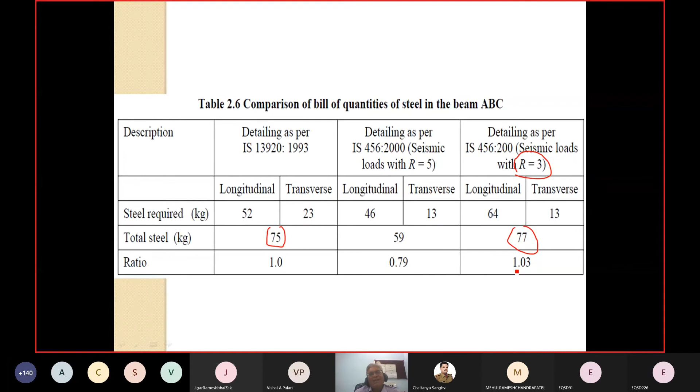Finally, the comparison is the interesting part for us. So let us look at the same three issues I discussed, but here for the case of zone 2, where earlier it was zone 4. In zone 2, the total steel with ductile detailing and total steel with response reduction factor R equal to 3 do not show much difference. So as the code prescribes, in zone 2 there is no need to go for ductile detailing — this is almost appropriate.

So with this, let us summarize today's section. Actually, the code gives detailed criteria for beam column joints, shear walls, and other things, but it's not possible to cover all within this half an hour. So I have tried to minimize the content just to understand the philosophy of ductile detailing, why there is a need for it, and what needs to be ensured. Inelastic shear deformation, which leads to collapse, shall be avoided by providing suitable strength differential. Ductile design or capacity design is a necessity to be practiced to avoid collapse of the building — that is very essential. And ductile design and detailing costing more than ordinary detailing is a misnomer.

We have seen this in both exercises. If you consider the earthquake force versus if you do not consider the earthquake force and design for gravity force only, there is a difference. But if you design structures for earthquake force, there is no much increase in cost by adopting the ductile design criteria.

So with this, I have tried my level best to cover the ductile design philosophy and the criteria given in IS 13920. The new code has given a lot of new provisions for shear walls and beam column joints, which were not there in the earlier code. This is described here, but the code is going to be continuously evolved, because as we learn from different earthquakes, we get more and more new insights.

It's absolutely wonderful, and thank you very much, Vijay sir. It was really nice.